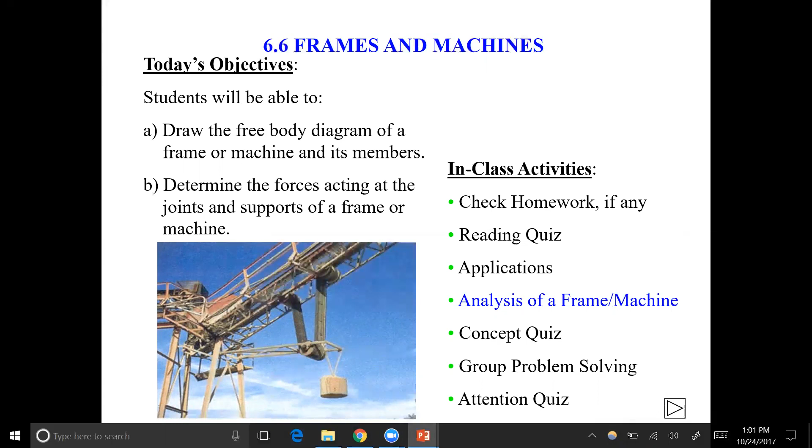So I went back to this with El Reza. He was really confused about what's the difference between a frame and a machine. Now that you've seen them, basically a frame has at least one multi-force member, right? So...

When you have something like this, that's a truss, because all the loads are applied at the pins. But if you put a load like here, then it becomes a frame, because now you have a 3-force member.

There's still some stuff you can do. Yeah, 3 forces on a member, then it's a frame. So that guy right there is a 3-force member because it has forces applied here, here, and here.

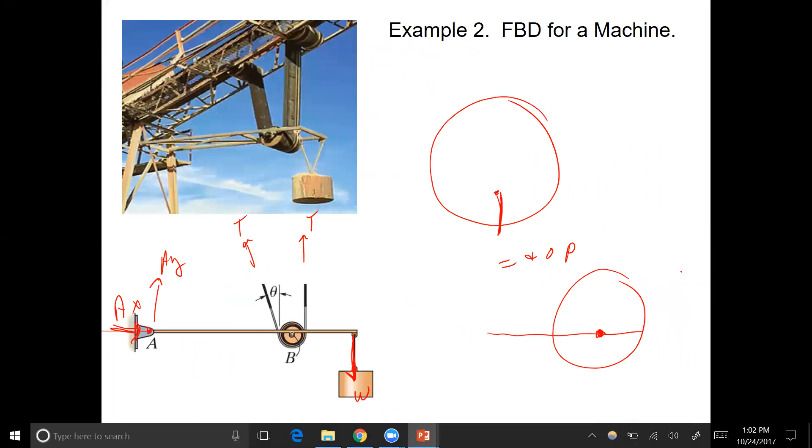So, no, they were all trusses. Yeah, the loads are all applied at the pins, so they're all trusses. Last week was all trusses.

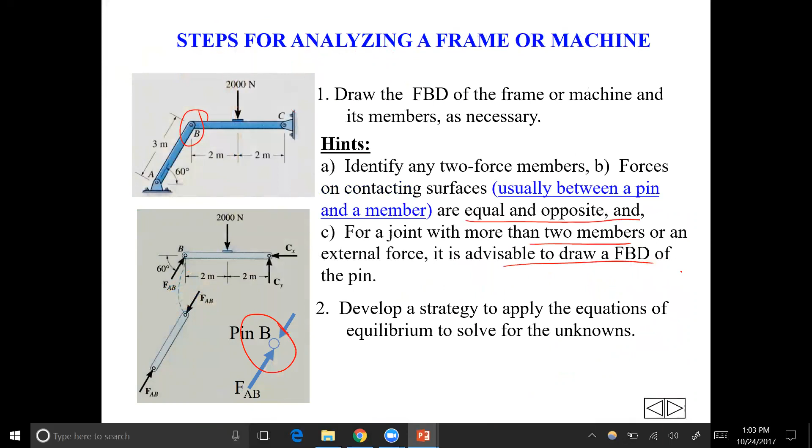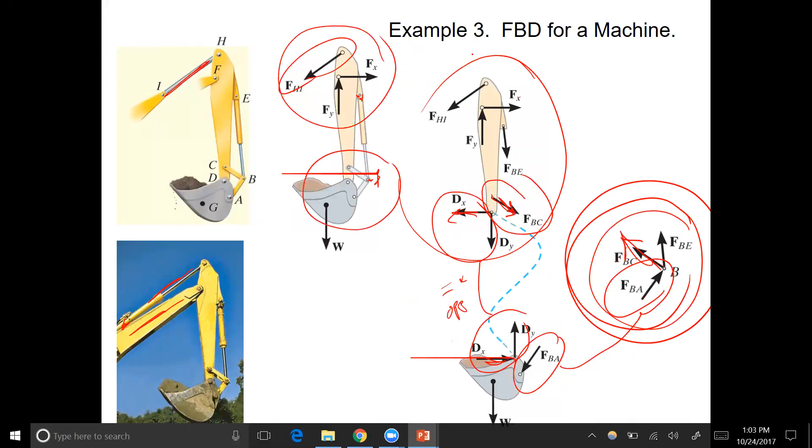This week they're all frames, but some of them, like the backhoe, have parts where you could do the method of joints here at this point. Can't erase that. But this guy there, that's sort of a method of joints area. But the other parts, you've got to draw that guy and label all the forces internally to it.

So we did this one together, and then I did this one kind of fast. So I don't know if you wrote this down. Should we do this one again? Because that was kind of fast at the end. Want to start with this one?

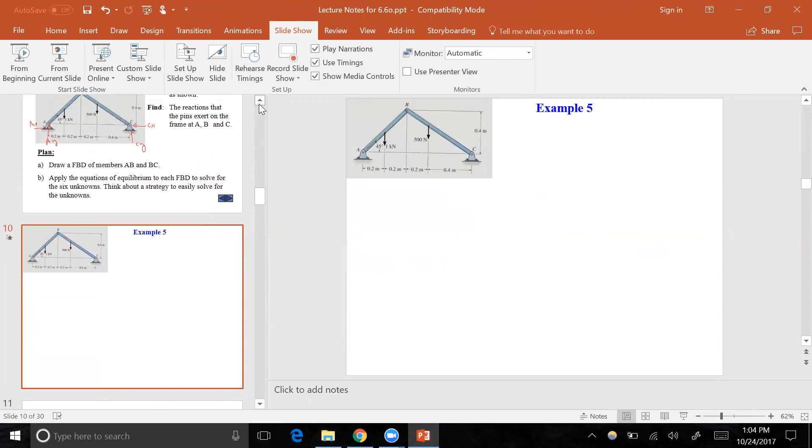So you've got this guy, whoops. Well, this one where we only had, excuse me. No, I always have a little congestion, allergies and stuff.

So this guy has one multi-force member, and this kind of shows the difference between a multi-force member and a 2-force member, right? We did this yesterday. The 2-force member only has one unknown associated with it.

It's only got forces applied at those pins. The forces have to be oriented in the direction of AB. So all I got to figure out is the magnitude and the sign, whether it's compression and tension. That's really simple with two force members.

But with BC, because you've got this third force applied in the middle, that makes it a three-force member, meaning that the forces are no longer collinear like they are in a two-force member. They can be pointing in different directions, and in general, you're going to have three unknowns on each three-force member.

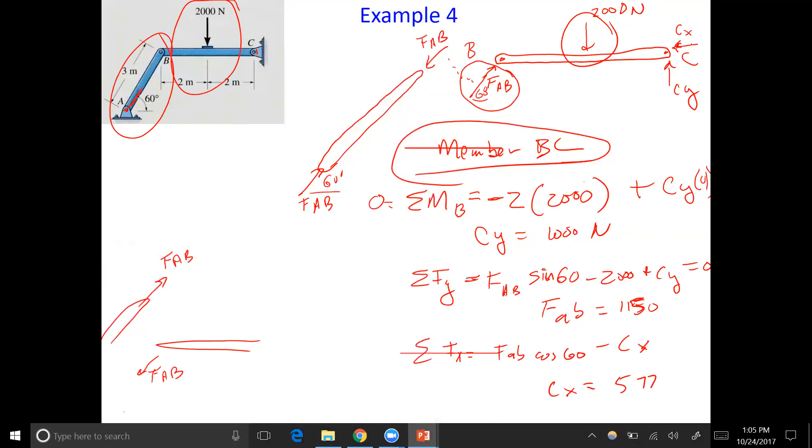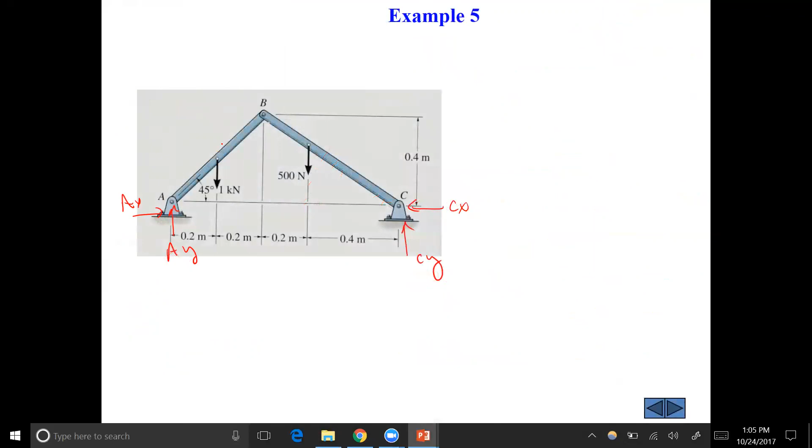In some cases, 4 unknowns, which we're going to look at in this one. So here's that slight addition to the basic idea of the last one by adding another force. Of course, we bent it a little bit, so it's not exactly the same topology. And we want to find the reactions that the pins exert on the frame at A, B, and C.

So each pin, we got to figure out what's going on at each pin. And as we're used to by now, we know that the pins at A and C are holding that thing together. So they could potentially give a CX and a CY.

And, a point of distinction or whatever, if this 1 kilonewton force was not there, the force would be oriented along the line from A to B. It would sort of just be one unknown again, right?

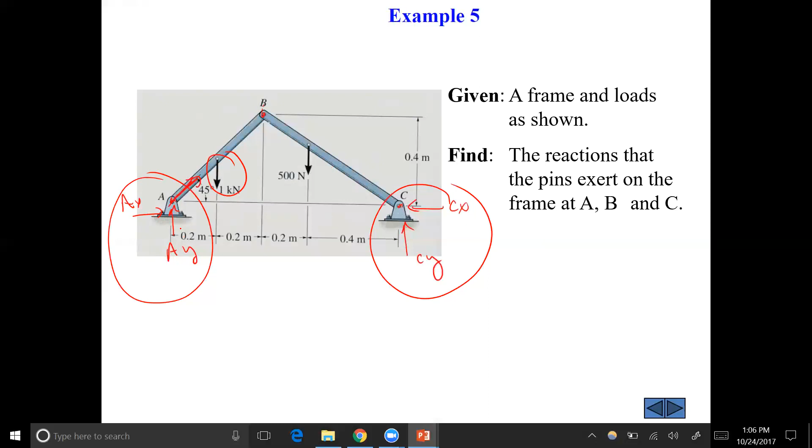If it was just this member going to that joint there, then there's only one unknown, because AX and AY would be proportionally scaled so that they would point along the line from A to B. So the only unknown is the magnitude. When you add that force there, then you have a separate AX and an AY, and it's no longer going to be collinear, oriented along the line from A to B.

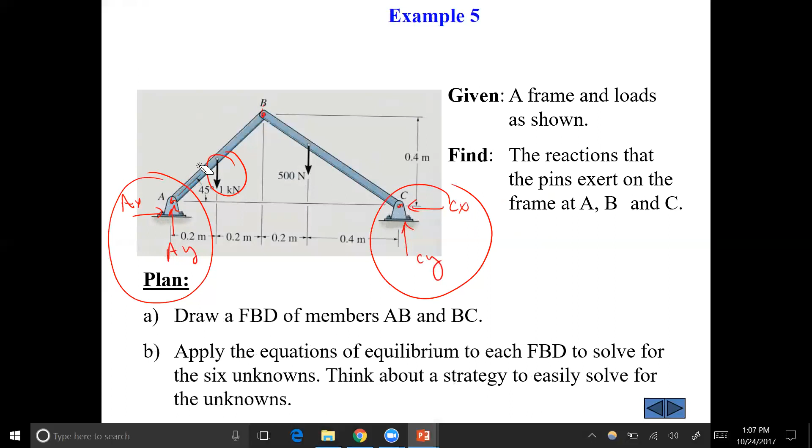So we draw the diagram of the members, and then we apply the equations of equilibrium on each member to solve for the 6 unknowns. So there's 6 unknowns here, and we have to figure out the strategy to solve them.

So the member AB is drawn, and the member BC. We split this thing apart.

We presume there's going to be an AX and an AY. I found out, I did a little more research into what's going on with this stupid thing. It turns out it looks like it's PowerPoint 2016. It's not the hardware, it's the software. So I think I'm going to buy 2013 on eBay. It's really annoying. I can't stand it anymore. It's driving me crazy.

Yeah, I can't annotate it though in Google Slides. Yeah, PowerPoint has the annotation feature. There are some other annotation options I could try to explore, but I think the easiest thing for me would be to just get 2013.

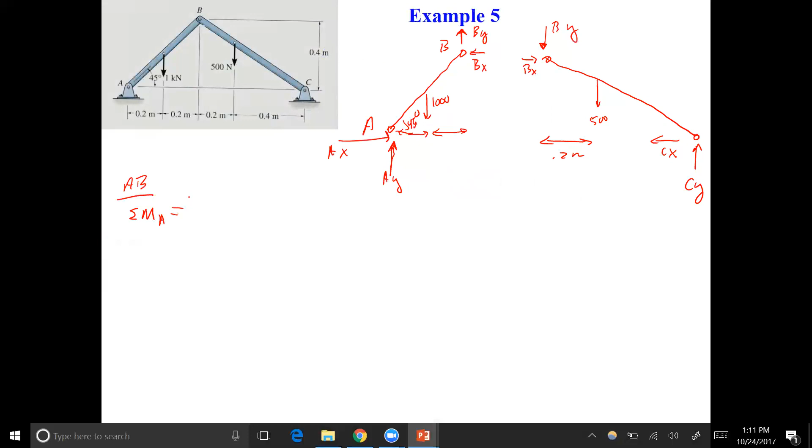And the sum of the moments at A, for instance, equals... moments about A. You're going to have a bx times 0.4, and that's positive because that's going to give you a counterclockwise sense, right? And you're also going to have a by times 0.4. And you're going to have 1,000 times 0.2 going in the negative direction.

Actually, that's on AB, and then on member BC, you can do the sum of the moments at C. Negative? No, positive, right? Positive 500 times 0.4. Again, we're keeping the counterclockwise being positive.

And what else? Isaac, what's a moment about point C? Keep going. By itself is not a moment though, right? So complete the moment: what is the moment that by is providing around point C? Yeah, what's the moment, what's the torque that it's providing about point C? Yeah, and is it positive or negative? Okay. David, how about another one?

So then we have an attention quiz. Are you paying attention? When determining the reactions at joints A, B, and C, what is the minimum number of unknowns for solving this problem?

Good question. 6? Anybody think 6?

Jose, what do you think? Look carefully.

Choose wisely. This is going to be like on the final. You're going to go, oh my God, what was it? Remember that.

What's the distinction? What's the difference between this one and this one?

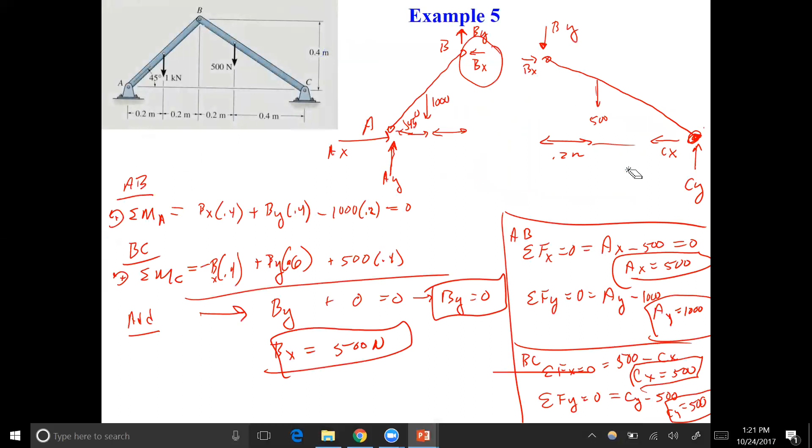No, there's only one force on that one, right?

So what is member BC? Yeah, what do you call it? BC, what do you call BC? BC is a two-force member.

Okay, you're really stumped. What are you going to do on the test? You're going to draw a free body diagram of each member, right?

What's the unknown on BC? FBC. It's either a tension or compression force. It's like a truss — it only has one unknown, right?

Because you have this 500 force here, and you've got a load here, so whatever this guy is, it's a two-force member. Therefore, it can only apply a force at B that's oriented along the line from B to C.

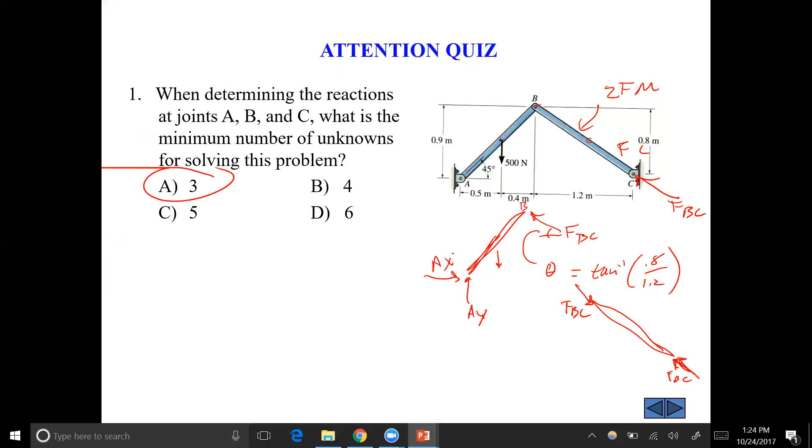I love that we're doing this on your final exam. This is going to be so awesome. Guys...

Oh, I think it's, I don't know, I have to look it up. It's on Canvas. It'd be probably about 30% or so, yeah.

Yeah, about 30%. So I want you to leave this class with this stuff. You've got to be living and breathing this stuff, right? Because this is what you're going to be doing. This is it — you want to be an engineer, you've got to know this stuff.

Why are you laughing? How are you going to succeed if you can't remember this stuff? This is like the most important thing you can do. Everybody, when they get back to me, they go, oh my God, there's so much statics.

For the above problem, imagine you have drawn a free body diagram of member AB. What will be the easiest way to write an equation involving the unknowns at B?

So, the moment at A.

Sum of the moments at A equals 0, right? What about the FYs, can we do it using FYs? Not really, because to find the unknown at B, you want to do the sum of the moments at A, since only B is unknown there. If you do the sum of the FYs, you're going to have a B component and an A component. Sum of the FXs, you're going to have an A component and a B component too, so you'd only have 2 unknowns there. But if you do the moments at A, the only things giving moment at A are the 500 Newton force and the force FBC.

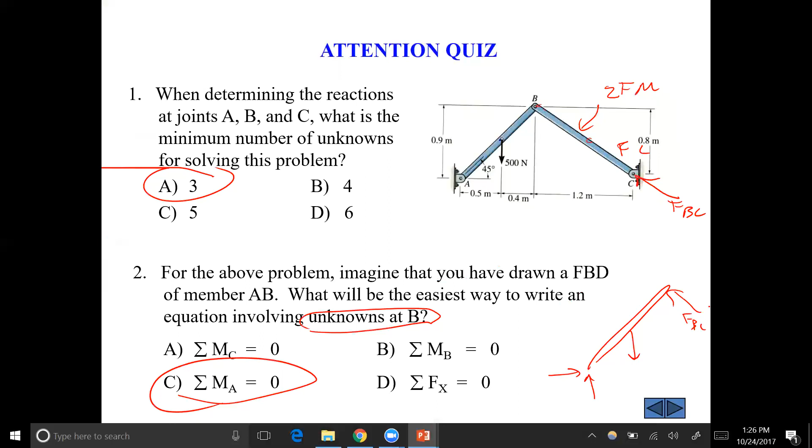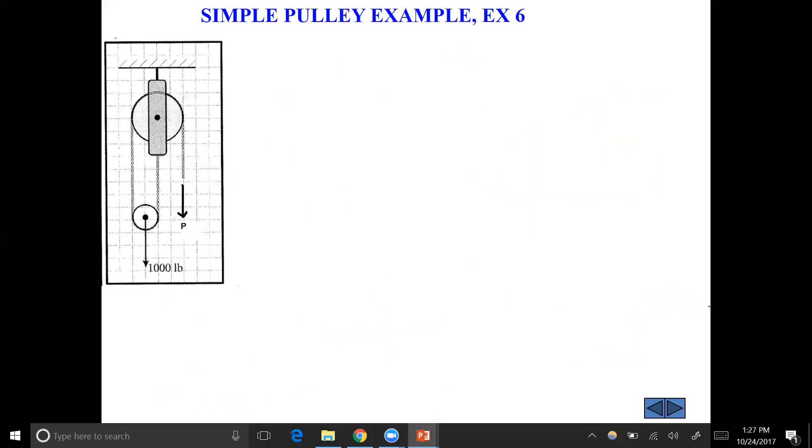So pulleys are actually pretty straightforward. This is a block and tackle. It looks a little strange at first, but it's the same principle - it's a machine. You draw the diagrams of the pulleys, and you apply the equations of equilibrium and solve for the unknowns.

So in this case, what are we doing here? We're going to draw the free body diagram of the pulleys, and we've got to find P to hold that 1,000-pound load with this pulley system. It's really kind of fun - just like you break apart a frame, you can cut the ropes on a pulley, and if you cut the ropes, you draw the free body diagram of each part.

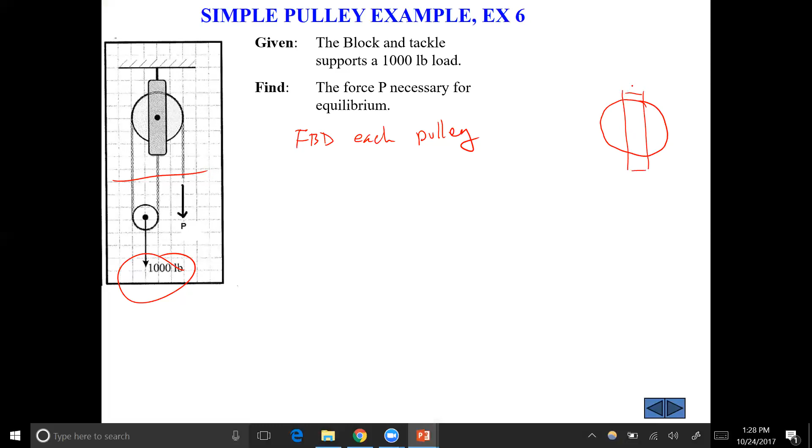So the first pulley has a bracket, and it's going to have this thing here, and this guy, and this guy, and this guy. Now, these are ropes, and you've cut them all. And yet, because this rope is continuous, it's only one rope, right? And they didn't say this, but these have to be frictionless pulleys.

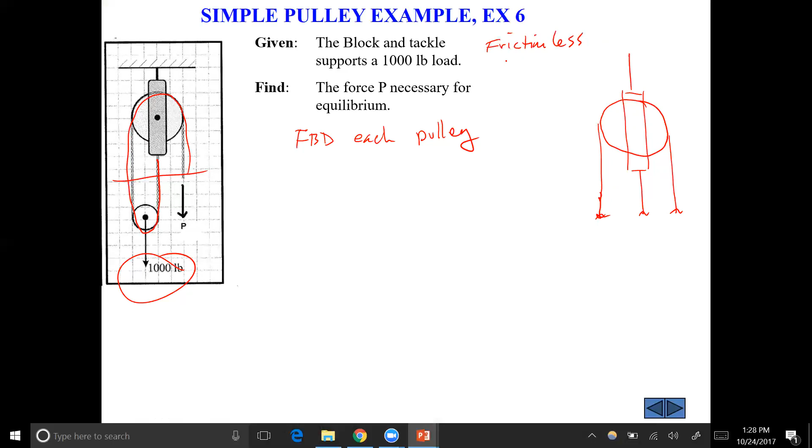And if it's frictionless, what does that tell us? Rope tension is the same everywhere - no matter where you cut it, that rope has to have the same tension. If you had one long rope and you're pulling on it, attaching something from A to B with some load on it, the tension would be everywhere. If you cut it, you're going to have the same tension everywhere. Just because it's in a pulley, if they're frictionless pulleys, it's the same way - the frictionless pulleys just communicate the tension all the way through the rope. It does not change anywhere.

That rope has the same tension throughout, no matter where you cut it, which simplifies the analysis, because that means you've got a force P pulling down over here, a force P pulling down over there, and a force P pulling down over here. And then you'd have a force of 3P pulling up. The bottom pulley is going to help us find numbers, because right now these are just P's, so that doesn't really help - 3P is 3P.

This is just equations of equilibrium. The bottom pulley has a rope like this, and a load here, with 1,000 pounds pulling down. What's the force pulling up at these points? P again. So for the bottom pulley, the sum of the Fy's has to equal 0, and that's going to equal 2P going up minus 1,000 going down. So therefore, P equals 500.

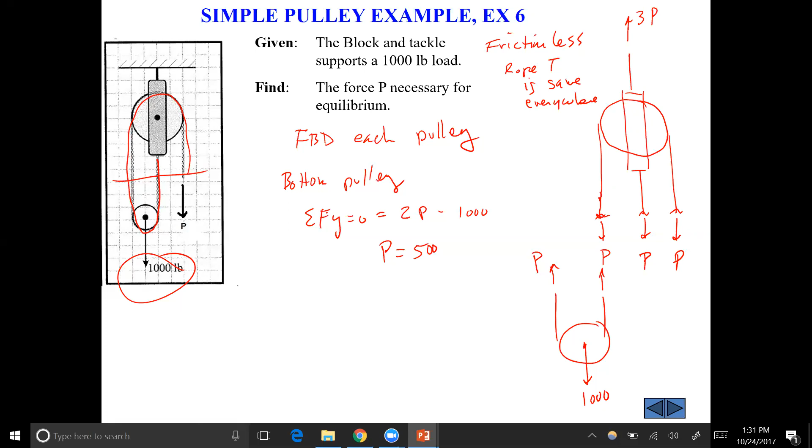Because otherwise they seem like this mysterious thing, but you can always change them into that, right?

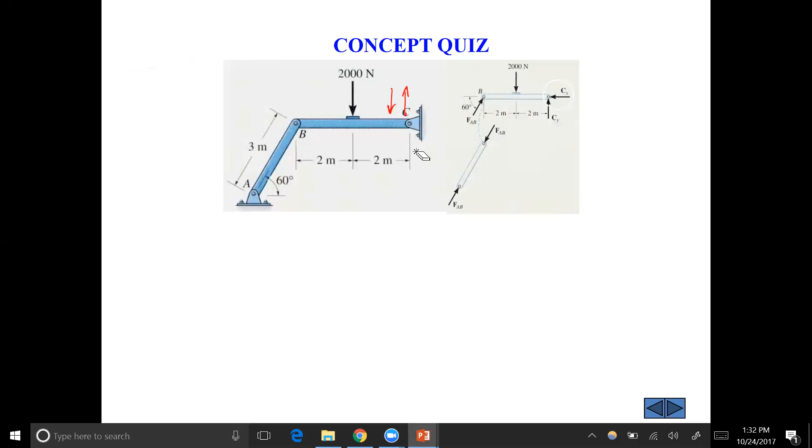There was one test I found from somewhere, I forget where, maybe Arabia. And they drew couples like that. They didn't use this curly Q because that's kind of a little bit weird. They drew it like that to show you that was a couple. It's actually just two forces, equal and opposite.

So you add one of those at C on that member BC, and what happens to the diagram of member BC at B when you do that? In other words, what happens here? A, B, C, or D? Somebody?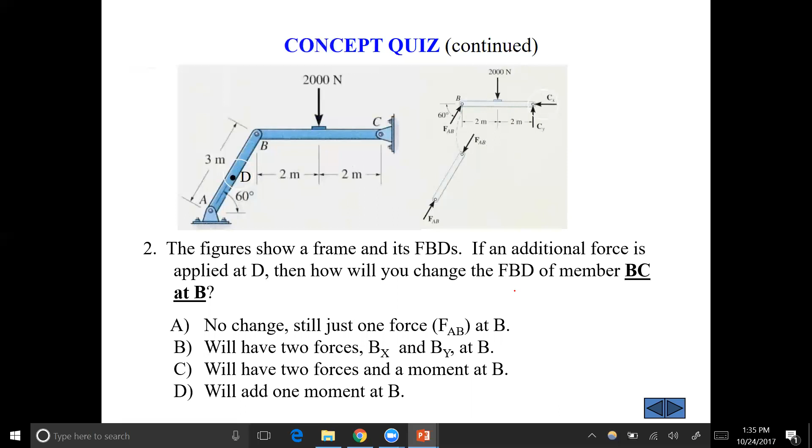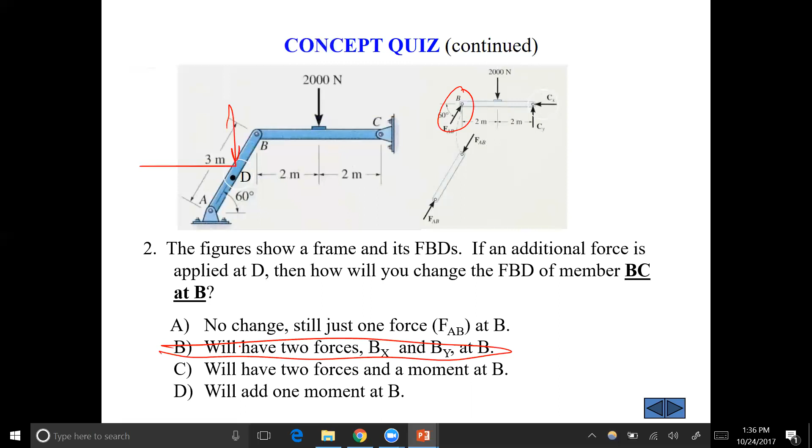First person to answer is Jose. So now we're adding an additional force at D, right here. How does that affect the joint right there? B, you have two forces. Yes, because it is no longer a two-force member. Yes, these are really great questions, aren't they? Man, you're just going to love taking the final.

Remember when I told you, when you have like three things coming together at a joint, it's often helpful to do what? Draw the diagram of the pin, because the pin is where all those three forces are going to have to balance out. The three different members coming together, those forces are going to be distributed across that pin, and they're going to add up to zero. So that kind of thing is important.

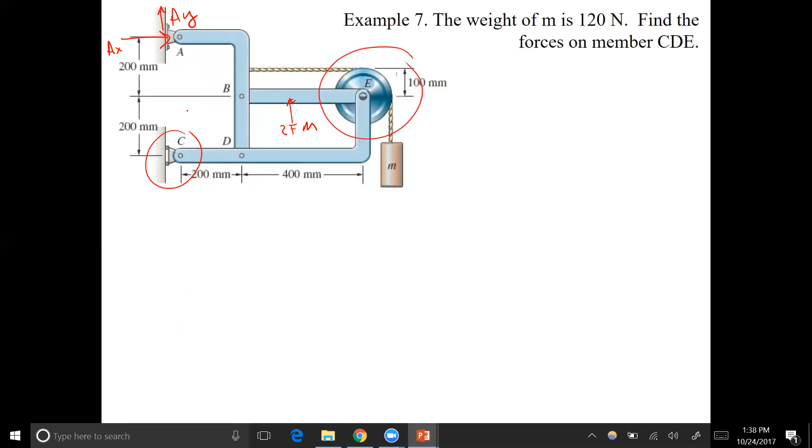Okay, what kind of a support is here at C? That's a roller, so we're just going to have a CX there, right, CX. The weight is 120 Newtons, so you have a 120 Newton force out there. This is, or, 100 millimeters or 0.1 meters. Oh, this pen is annoying too, so I can't find the eraser very easily.

In order to get this going, we can find these reactions, right? We only have three unknown reactions. We can solve those with the equations of equilibrium for the whole body. So the free body diagram for the whole frame, I've already done it. I've marked up all the forces on the whole frame right here, the AX, the AY, the CX, and you've got that 120 Newton force pulling down there, right? So we can solve those and say, okay, the sum of the FYs equals zero. So that's going to equal AY minus 120 Newtons. So therefore, AY equals 120 Newtons, right?

The sum of the moments at A will allow us to find CX. So we're going to have CX times the moment arm—let's put it in meters. CX times 0.4 meters minus the moment from the 120 Newton force, the moment arm is going to be what?

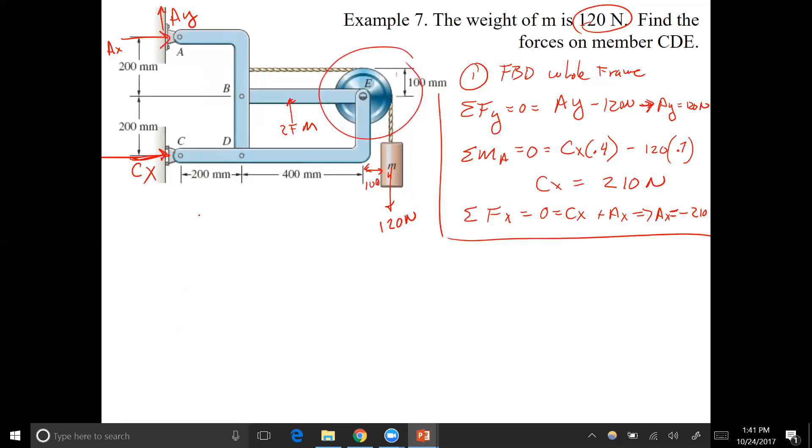Now we want to do a little more involved work of breaking apart that frame and solving the internal forces. Actually, all we're asked to do is find the forces on member CDE. But in order to get there, I think we're going to have to do some of these other ones. So let's start by looking at...

ABD. So those reactions we just found are applied there. We already found those, so we can just use them. We've got a tension force acting somewhere on there, 100 millimeters up, I guess halfway between there and this pin at B, which is going to have a force on it as well.

And since BE is a two-force member, how many unknowns are involved at that point? Just one. We can say that it's in tension—I don't know if it could be tension or compression. And at D, how many unknowns are there? How many reactions are at D?

Two, right? Because CDE is not a two-force member, it's a multi-force member as well, so therefore it's going to have two: a Dx and a Dy.